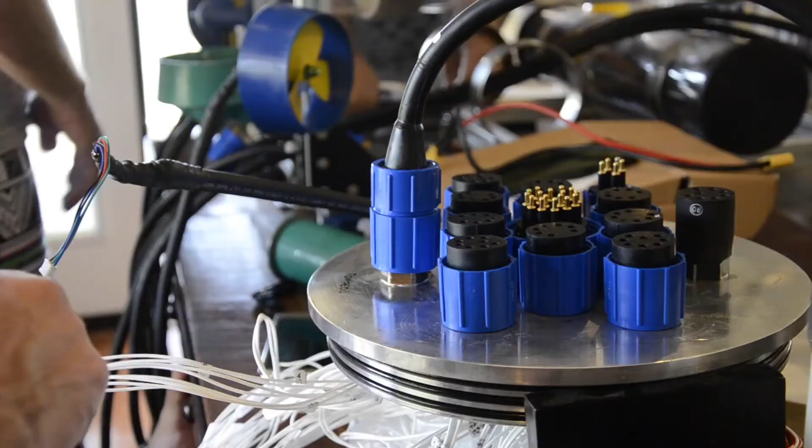Crew, despite the world and country situation, we can't stop. We won't stop. We will continue to produce cutting-edge technology. So batten down the hatches. Let's do this.

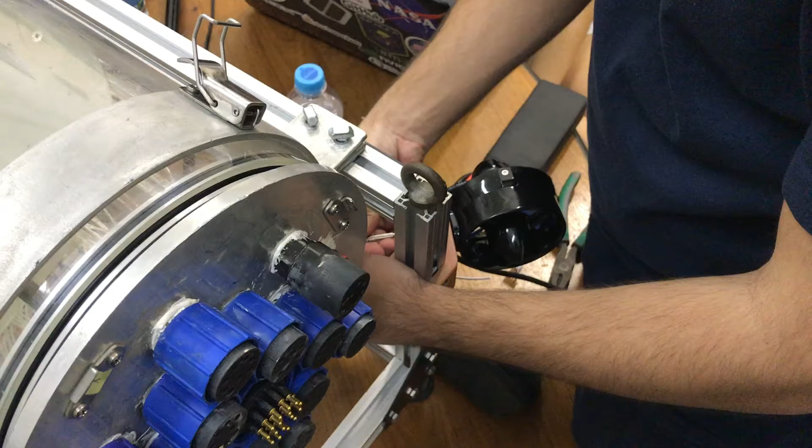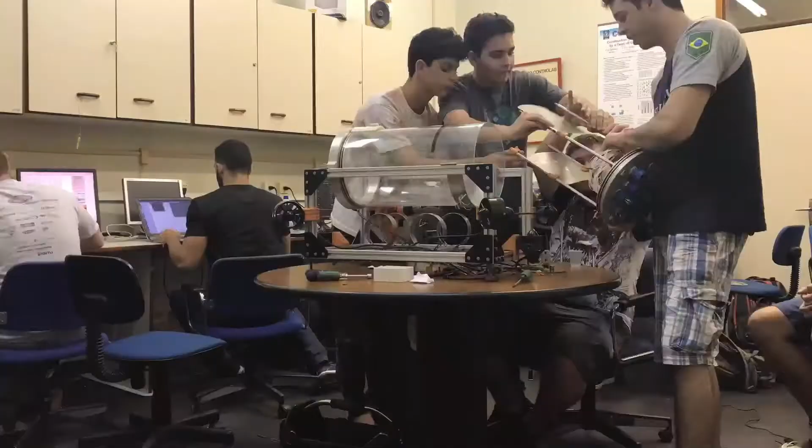Nautilus, the Federal University of Rio de Janeiro team, dedicated to the development of autonomous vehicles. The only one from South America to compete in RoboSub.

Our team is composed of 5 areas. Management is responsible for evaluating the team's performance, as well as mapping our goals and how we can achieve them. Also, we report all of our steps, documenting our achievements and failures, so we can always improve.

We are also responsible for the team fundraising, searching for sponsors and partners, the internal organization, and the team communication, attending all technical meetings, and documenting all that's going on in the internal areas.

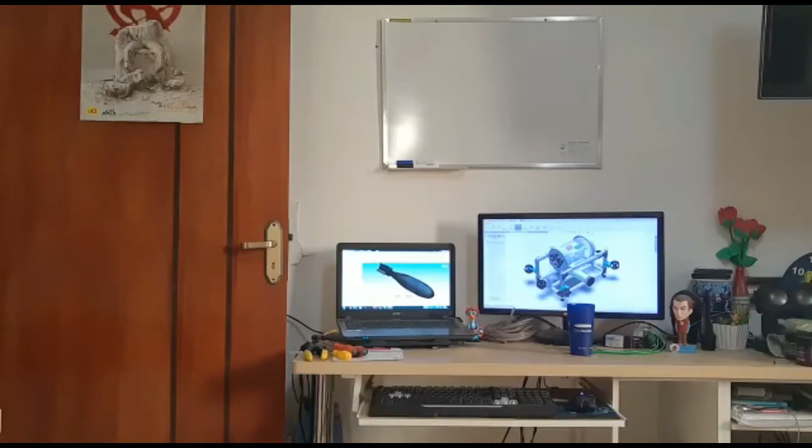This year, despite the pandemic situation, our team chose to make the best of it, so we decided to develop our new AUV. There were many challenges, but through several online meetings, we managed to organize ourselves in order to run the project and get new sponsors for the team.

Marketing is responsible for the team image. Showing the best that the team has to offer, we seek to demonstrate to the students, science community, and sponsors our full potential and how much we can achieve in the autonomous technology field.

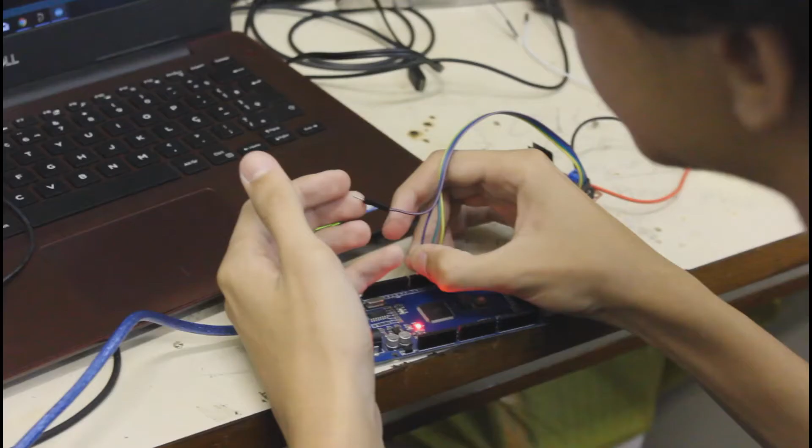The electronics are responsible for integrating the mechanical parts to the software developed for the AUV. The sub-team works on implementing communication protocols between the components of the sub, as well as guaranteeing all of its electrical safety. The main electronic project this year was to create a full system capable of making the acquisition of external acoustic data. This system is built to capture acoustic data of a given frequency, which is then processed and read by the main computer.

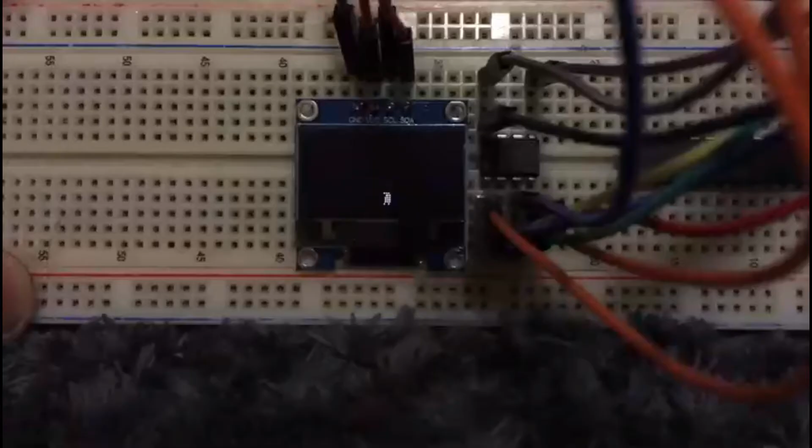Besides that, we focus on making the AUV easier to maintain and operate. In order to do that, we develop a functional telemetry system giving the operator real-time information on the sub status and battery level.

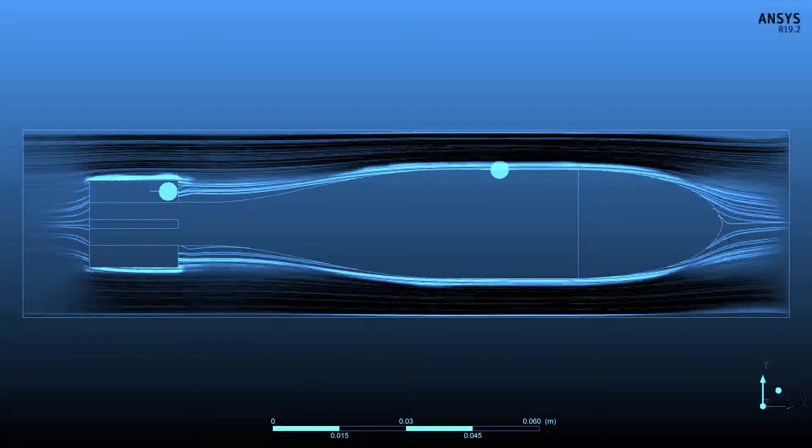The Hydrodynamics and Mechanics team is responsible for guaranteeing the protection of the electronic components from the water. It also develops prototypes of different structural components and additional projects such as torpedoes, drop markers, and mechanical arms. Some of these components are the frame and the thruster support. In order to do that, we use SolidWorks and ANSYS for the elaboration of 3D models and simulations.

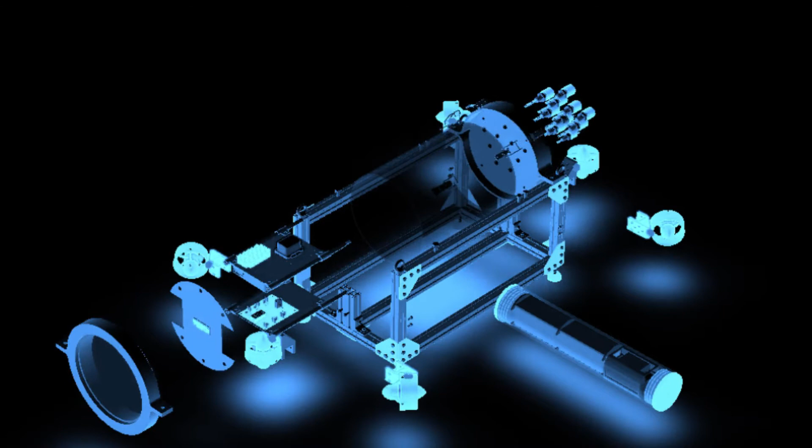We are also responsible for the AUV's modularity, which makes it easier to make changes and improvements, as well as the selection and sometimes fabrication of the materials, and the locomotor system of the robot, guaranteeing the specific types of thrusters needed for the best navigability in the RoboSub tests.

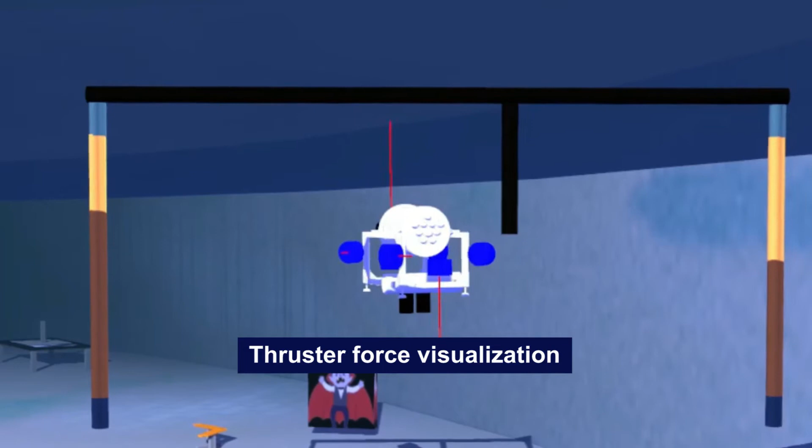Software is responsible for the robot's intelligence and decision-making process, via treatment and fusion of sensor data. We simulate the whole RoboSub competition, so we can know if our AUV is able to conclude all the tests. Using SLAM algorithms, optimized by ROS, we're able to achieve quality autonomous navigation for our AUV.

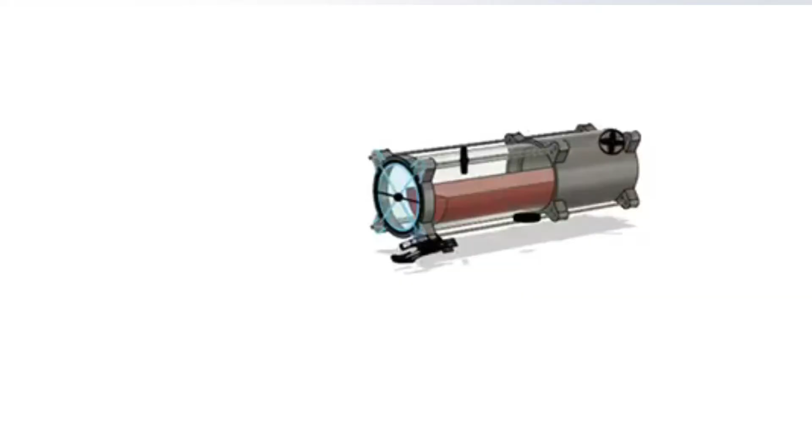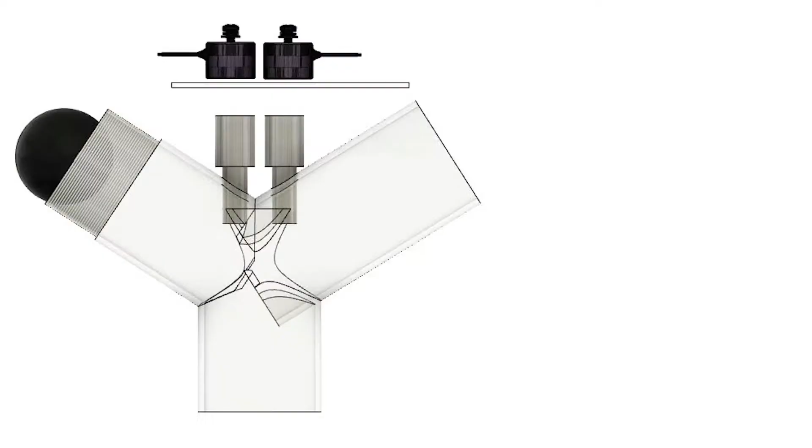Beyond that, this year we focused a lot on our newest AUV. Our Hydrodynamics and Mechanics team is working non-stop to develop the best structure for our AUV. And through all the hard work from our technical team, we were able to add 3 new skills to our next AUV.

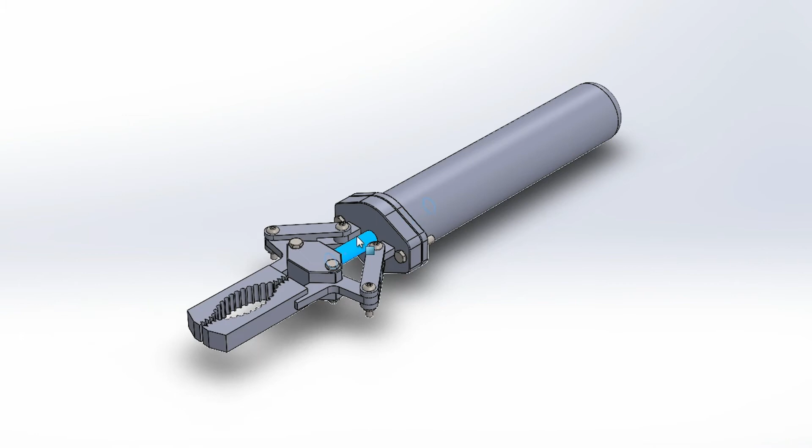Therefore, we can once again represent Brazil in the biggest competition of cutting-edge autonomous technology. Our team works together so Nautilus can be better each year, with constant improvement, moving towards victory. This is our AUV.

This year, given our limited time to physically work on our robot, we decided to focus our efforts on getting the most points possible from all tasks that don't involve any object manipulation. Since the competition won't happen in a physical environment, we decided to simulate it on Gazebo with all the tasks that we would have performed. By doing so, we were able to make significant progress on the performance of our sub without the need to make direct changes to its hardware.

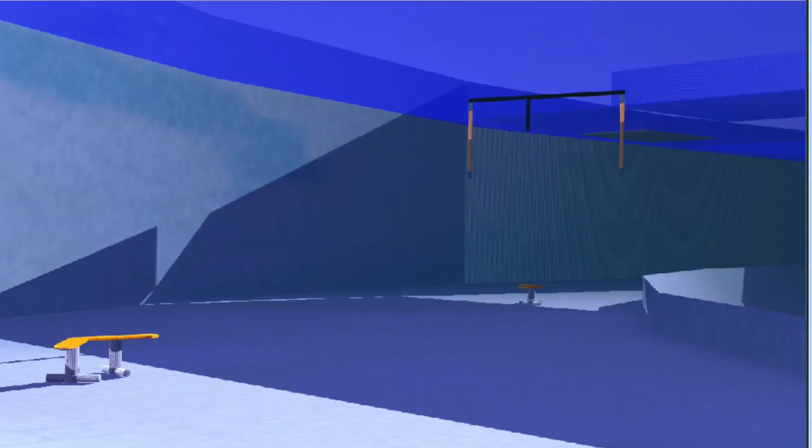So, we improved our sub software, allowing it to autonomously perform the coin flip, pass through the gate, follow the path, hit the buoys, and finally, emerge inside the confines of the octagon.

With a lot of hard work, commitment, and dedication, the Nautilus team seeks to open new paths to autonomous navigation from each step we take, putting Brazil in the forefront of the development of AUVs and autonomous technology as a whole.